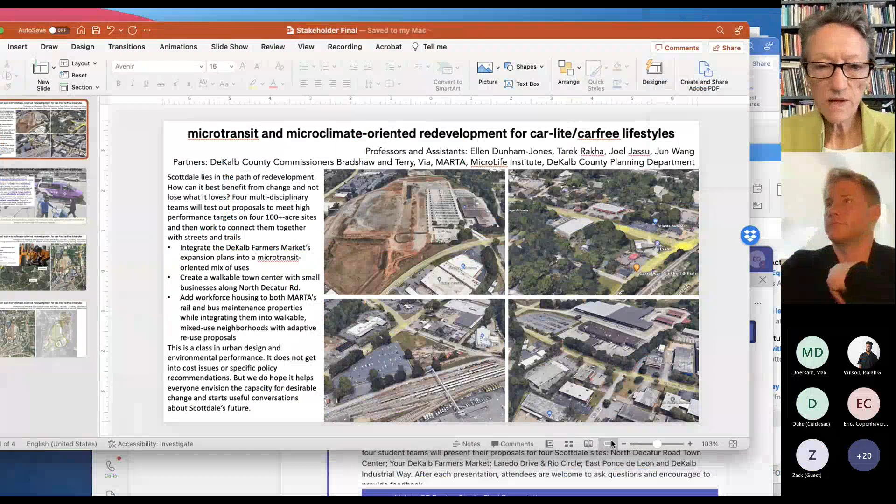Hopefully everybody is seeing a slide that starts with microtransit and microclimate-oriented redevelopment for car-lite and car-free lifestyles. So just to remind everybody, it's quite clear Scottdale lies in the path of redevelopment. All around the edges of Scottdale, we're seeing change and a lot more housing being built at much denser scales. So the fundamental question for the community is how can Scottdale benefit from redevelopment, improved connectivity, and a few more neighbors, but not lose what everybody who lives in Scottdale loves about the community.

So we listened to you, we met with you, we really enjoyed your feedback in the past. We have four multidisciplinary teams that have tested out proposals to meet high performance targets on four different 100+ acre sites, and then tried to connect them together with more streets and trails.

The sites, I think you probably remember—one is the DeKalb Farmers Market, really integrating the plans that have already been permitted for the farmers market to expand, but also now integrating into that a microtransit-oriented mix of uses.

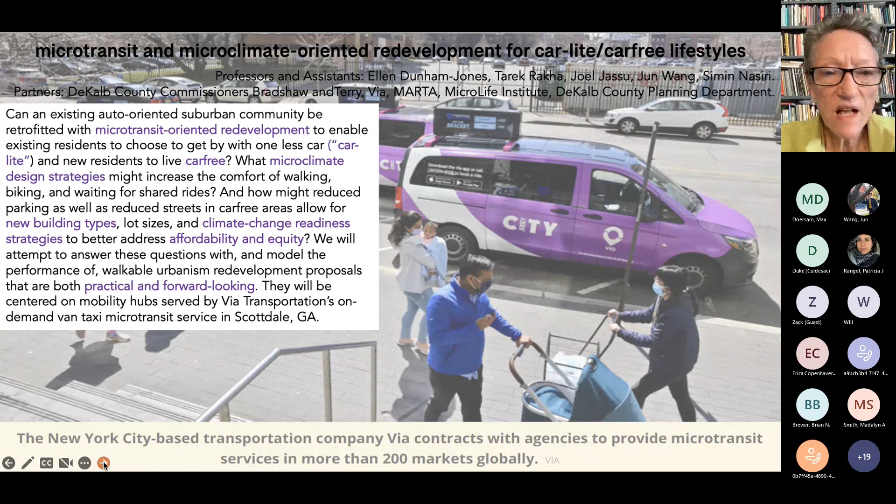Part of how the system generally works, with that integration of microtransit, public bus systems, private scooter companies, and privately owned bicycles, is by setting up mobility hubs where people can transfer from one of those modes to any of the other modes.

So the premise of the studio has been to look at where it would seem to make sense to locate mobility hubs, and then to generally densify around those hubs in particular, trying to allow a gentler form of more affordable density.

So the final projects—this is the last slide—show going from the Scottdale we know, which has some very large properties, but its industrial history means there aren't that many street connections. There are little pockets of walkability, but not much throughout this part of Scottdale. The new plans, stitched together from all four teams' proposals, show new trails and rerouted roads aiming to increase that connectivity.

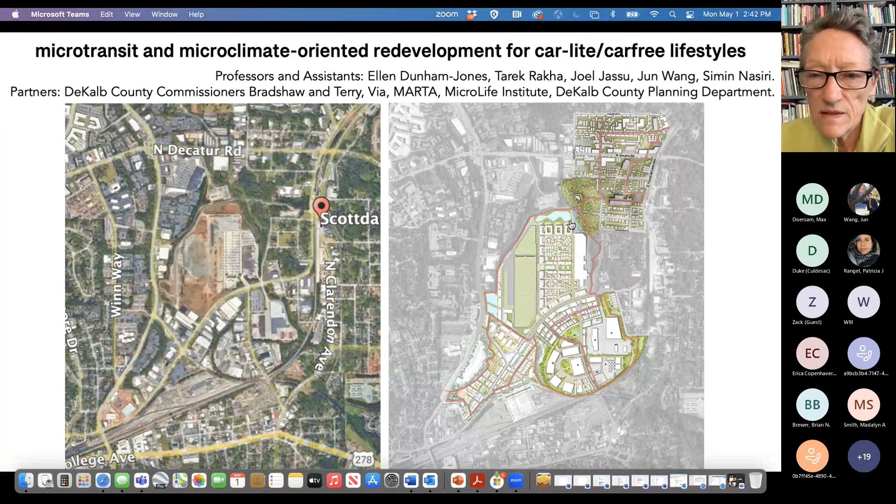All right, so Tarek Raka, are you here? Do you want to say any words? I don't think Tarek is with us.

Without any further ado, I think we can go ahead and start with team one, and I will invite the audience. The plan is I've asked the teams to each try to keep their presentations to 15 minutes. They're not going to be able to show everything in all the detail they've thought about, but they'll certainly give you a good idea.

We'll be publishing the students' work in PDFs online, accessible to the public through the Georgia Tech Library's public digital archive. We'll get those links out through Will and the MicroLife Institute. We'd love to hear your feedback, so we'll try to take a couple of comments at the end of each team's presentation, and then really get more general comments at the end.

So with that, I'm going to pass it to team one.

Good afternoon, thank you so much for joining us. We're just going to take a minute and introduce ourselves. My name is Patricia Rangel, and I am the MARC in our team. And I'm Akansha, I'm from the MSUD. I think our third member is with us, but she may be silent at the moment—Maryam was our HPBL student that helped us with all our climate analysis.

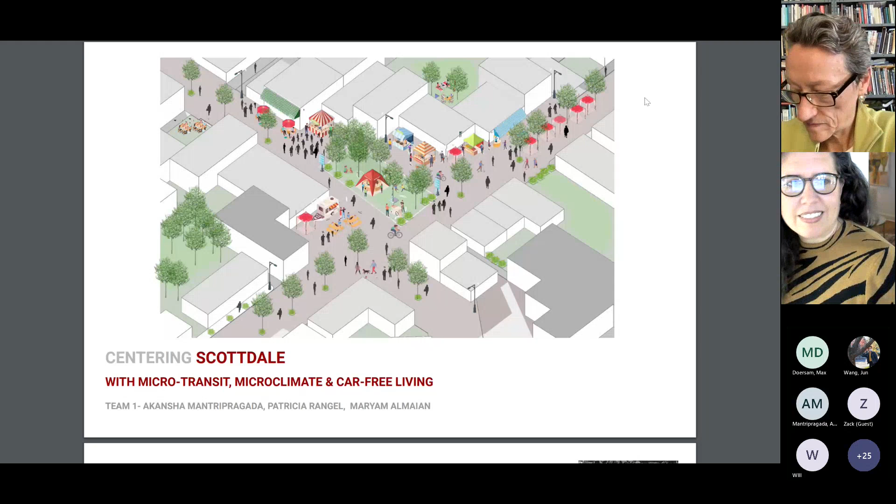All right, next slide. So our project—what we were really charged by the community at the stakeholders meeting to do—was to create a town center for Scottdale. Our zone, one of the four that we'll be presenting today, is actually in the center of Scottdale, and this intersection between East Ponce and North Decatur Road is a central hub.

However, we discovered—our goal was to create a micro-transit, microclimate town center that would serve Scottdale and the adjoining Clarkston, as well as the entire community about 7 to 11 miles out from Atlanta. So we know that there's imminent change for Scottdale at the moment.

The tenets of our project were threefold. We got to meet some wonderful residents of this area—our zone is the most residential, not very dense, but the most residential of the four zones. Our principles are: we want to keep the artistic nature and community already in existence; we want to promote the already self-sufficient, both environmentally and economically, culture that existed there; and thirdly, we wanted to do this incrementally to support people's ability to stay in the neighborhood so gentrification wouldn't displace folks.

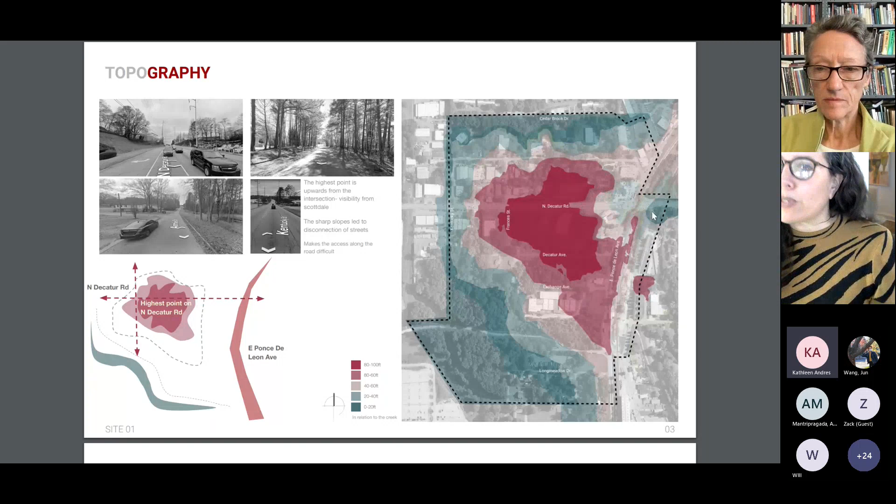Perfect, thank you. The grade difference really didn't allow for the town center to be right at that intersection of East Ponce and North Decatur, because the climb up was a good 8% in slope, which would make it much harder to reach many of these places, as these sections demonstrate. Coming east onto North Decatur Road, the slope is 8%; coming west, the slope is about 6%.

This topography definitely affected our understanding of the existing conditions in the street network. Some streets were not connected to one another because of those large differences in grade. And so we saw that people weren't necessarily able to capitalize on all the assets on offer.

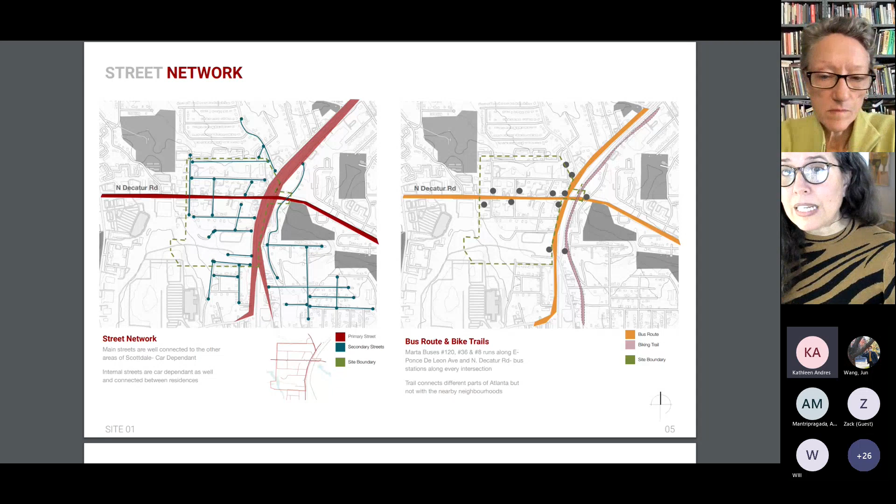On the right-hand side, you can see this tremendous bike trail asset, the bike lane from Stone Mountain Trail, right there. But these roads are quite dangerous to cross, and there aren't a lot of sidewalks, as we'll show in the next slide.

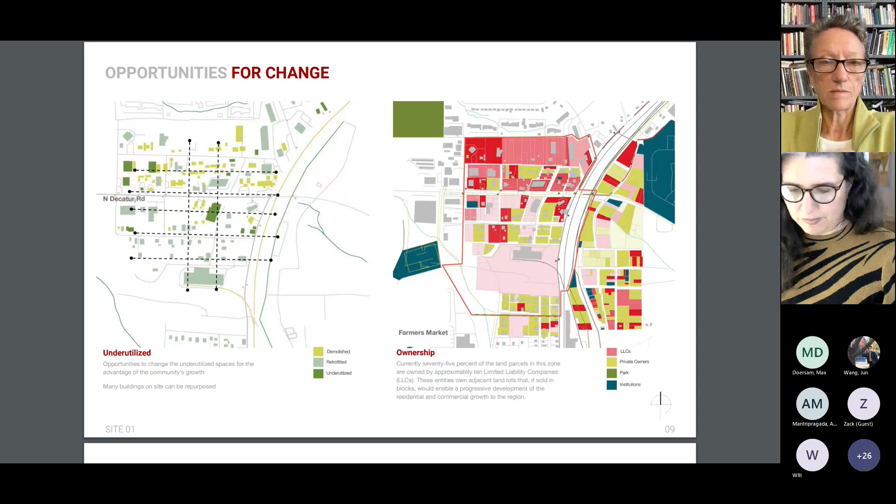So overlaying the county's plan, we envision a town center through the lenses of public realm, social infrastructure, different building types, and sustainability. We hope to achieve car-free living, walkability, dynamic streets with more tree canopy, artistic culture, and of course, more housing.

So we then went on to conceptualize our design targets by connecting streets, creating pause points, or a moment to experience more green infrastructure, and then developing around it.

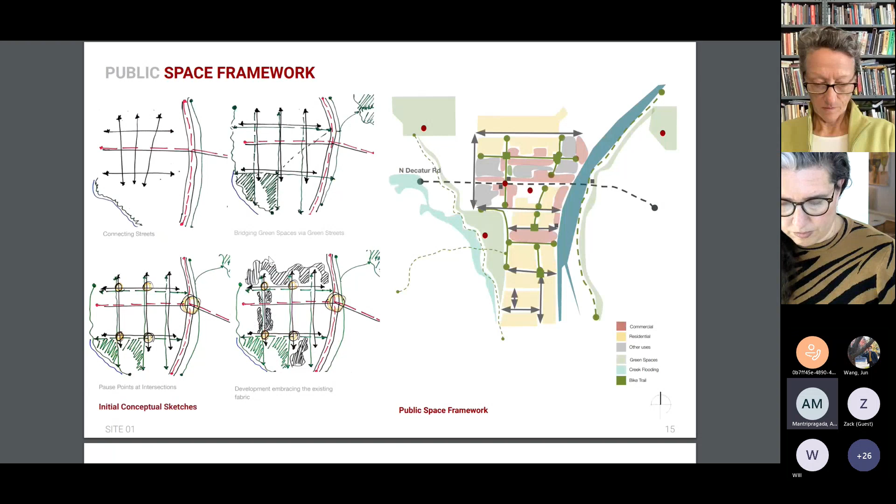After doing all of the analysis, we believe the mobility hub would be best placed at the higher ground, as Patricia already mentioned, which also lessens the speed of cars on North Decatur Road. In the smaller diagram, you can see we have our car-free zones, car-light zones, and car-heavy zones, which are mostly on the periphery of the entire site.

And that's how our plan would look. We have three zones: the Mill Center, Civic Center, and the Town Center. The Mill Center is about retrofitting the mill into an artisan square, with more housing toward the south of the mill — about 240 units — which doesn't look the way it does right now.

We're trying to blend into the language of the existing single-family housing, but it has way more units than you'd see. That leads to the retail pedestrian strip up north to the Civic Center, which is completely pedestrian walkable. We're trying to retrofit the storage unit into a resiliency hub, with lots of community gardens around it.

Which then leads up to North Decatur Road and a mobility hub right at the heart of North Decatur Road, with many transit options, leading us to this super block, or the town center, with a completely walkable retail space. We also have a lot of housing that we're trying to recreate from the cul-de-sac planning.

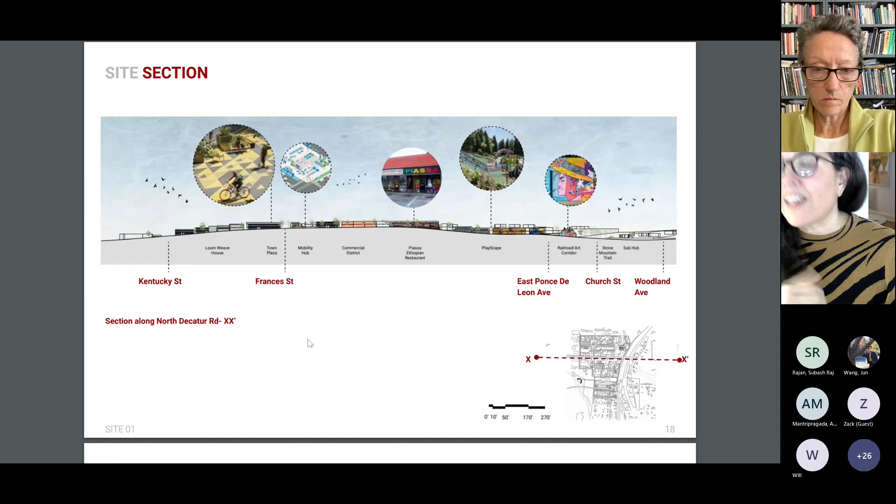This is how we believe our town center would look. We have a different hierarchy of streets, but completely walkable, allowing most services to enter, like trash services or fire trucks, but otherwise it's going to be completely walkable.

We hope to make it completely self-sufficient, both socially and economically. These are a few illustrations trying to show that. Our initial vision of the sketches of our town center was to look like this, where we have different transit options, more seating on the street, and it could be completely vibrant.

And lively. Looking at Akancha's beautiful drawings, I want to mention that in our site visit, this street, currently Alcove Street, was already almost more a pedestrian street than a car street. As we drove around, people were walking in the middle of the street because the entry from East Ponce is so awkward that in some ways we're just using the natural gifts of the site to enhance it.

And then we talk about the mobility hub. Here we're trying to show the different types of transit options that we're trying to incorporate. Overlapped with Miriam's HPB analysis, we're trying to have a net positive mobility hub.

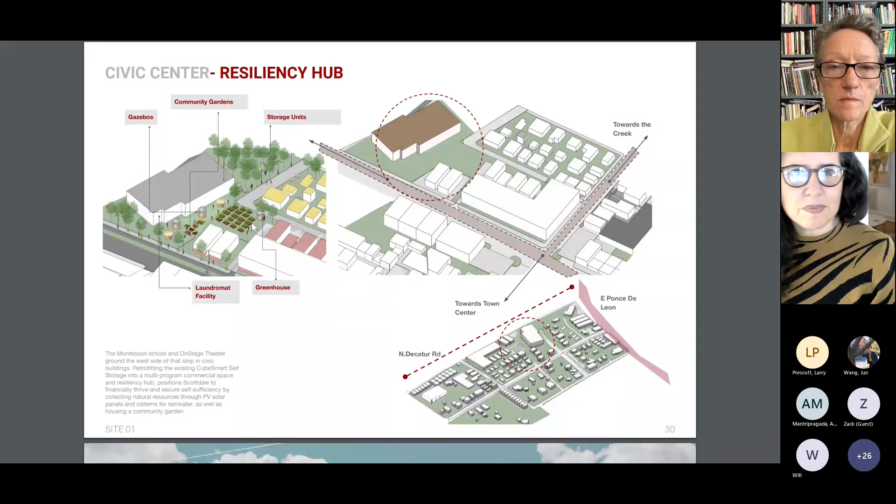But in the meantime, it would also be a place for the community to gather around community gardens, taking advantage of the gifts of the residents in building greenhouses and just creating a lively spot in the center of Scottdale. This is part of that vision.

And then leading down to the Mill Village is that pedestrian walkway that would intersect here, with some commercial spaces as well as resident spaces, more sidewalks and more walkability for residents.

These are some examples. Akancha did a wonderful job explaining how we wanted to really honor the style that's already existing. This type of housing is called missing middle housing. It looks like the traditional stuff in Mill Village, the historic Mill Village, but there are many more units in these structures.

That we are hoping can blend up to Cedar Brook Drive, where there are larger complexes of apartments. And so this is kind of a renovated mill with some of the housing that could be adjacent to it.

And then our last point is really that our regulatory plan is that we want this to be incremental. We want smaller lots so that it becomes accessible and affordable to new homeowners or those being displaced out of Atlanta, and that it can grow in a way that feels comfortable for everyone.

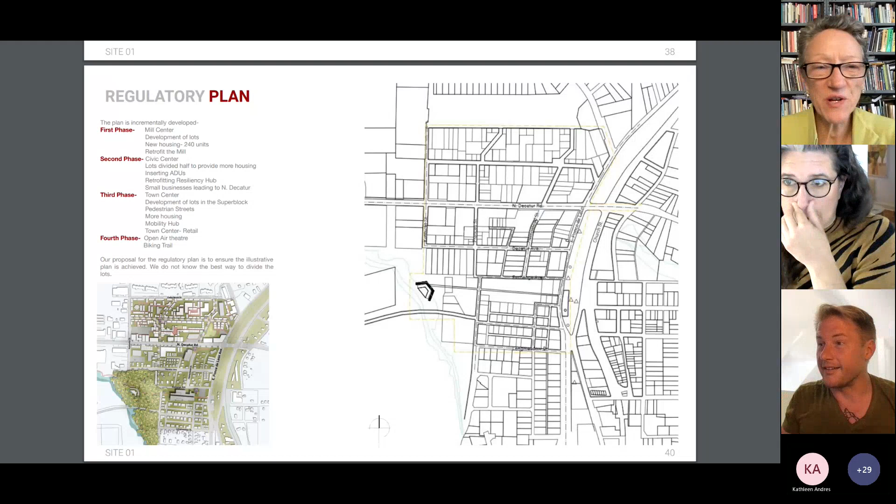Well, it was music to my ears when I heard smaller lots.

I think that's so, you're on point, team one. Thank you so much. And again, I think the idea of phasing as well as really utilizing the topography to your advantage in this plan was just great. So thank you for that.

Yeah, I definitely concur. I think that discussion of smaller lots and just better use of space is very crucial as we try to design a master vision for this Scottdale project.

I definitely like the reference to the super block. I think that to me is something I've been hearing about for years, and I think the idea of bringing forward a super block concept in DeKalb County would be great for publicity, showing that we're forward thinking, but also for the larger Scottdale community to have that environmental attribute, which is really positive, all things considered. So I'm really excited about this.

Yeah, I think that was it. Great job, team, really enjoyed it. Anyone else?

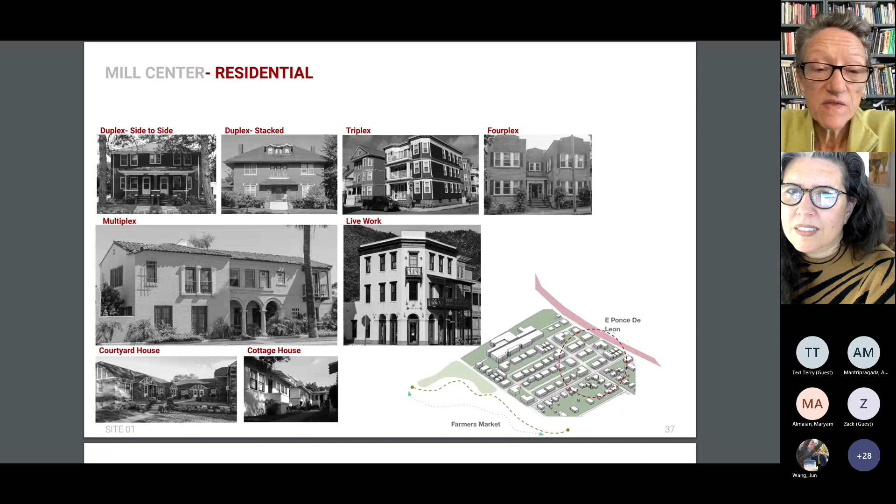Don't be shy. Maybe the team, if you want to flip back a little bit through some of your drawings slowly, I'd be interested to know how the community feels about the idea of the superblock being car free but mobility rich. Do you think that is realistic for Scottdale? Would you like to see that option?

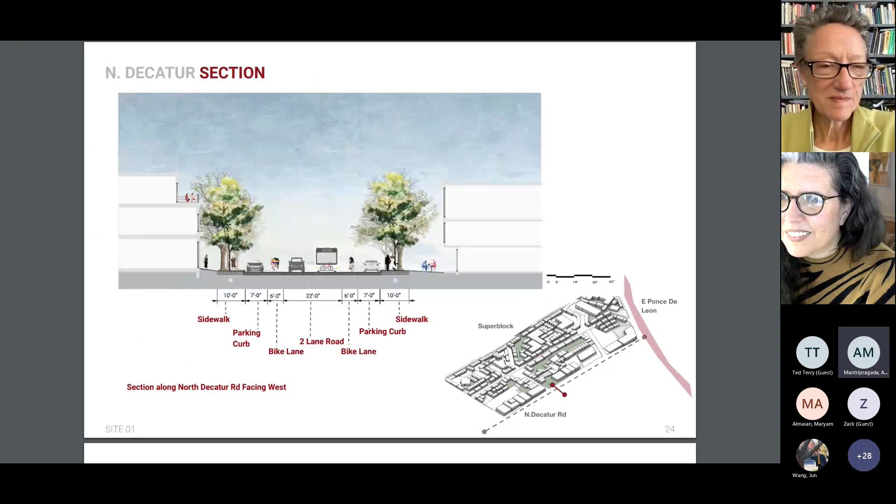Well, I think you guys did a great job presenting. I'll just say, Ellen, I think that is a great question, because there's so many other departments you'd have to coordinate with to actually make that happen.

But I will say that we are voting later this year on our SPLOST, which is a $600 million exercise for DeKalb County, and under the SPLOST rules, we can spend some of those funds on transit as well as transportation infrastructure. So I think this is great timing to help inspire the leaders in DeKalb to think about what might be an investment in the future. And this, to me, is a great opportunity to pilot out some of these methods.

Because I don't know if there is a location, maybe elements of the areas near the Beltline, but I don't know if there's a true pedestrian-only street, with that kind of transit piece to it. So I think that would be exciting to try to move forward. But yeah, you're right, you've got to get other players involved.

Commissioner Terry, I'll also say I learned so much in this studio. And I think some of the precedents that I got to witness about the superblock threw me out of my ignorance.

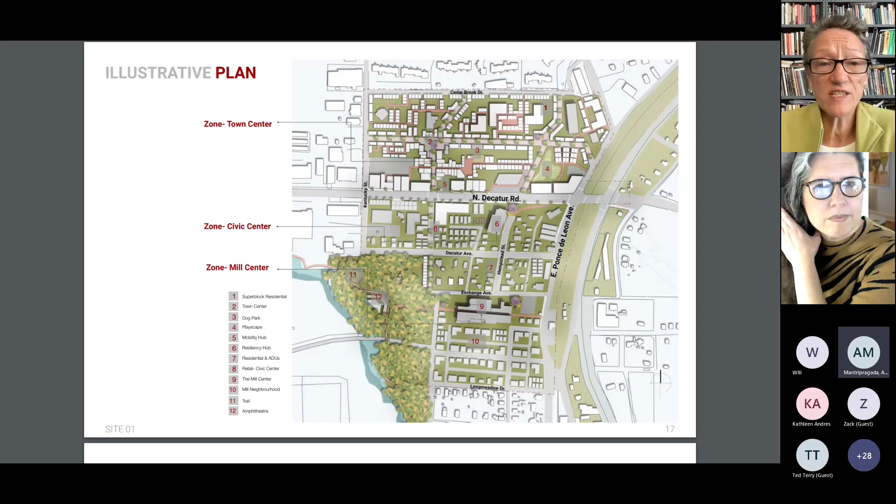No, it's a really important point, and there's a limit to how much, in a school project honestly, just how many people we're able to talk to in the course of the semester. So we're hoping to start some conversations, but we don't know either.

Well, I think it looks fabulous. So thank you, Kathleen, it's nice to connect with you again. And I'm sorry, I've been out working on houses—I look terrible, otherwise I would be on video.

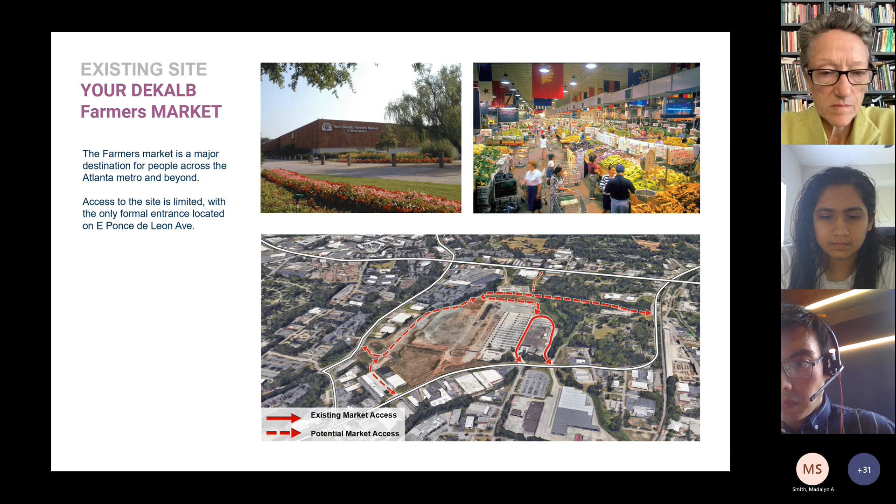So just really quickly, the farmers market is a regional destination attracting people from all over the Atlanta metro. Currently the only formal access to the site is off of Ponce de Leon, and the reason access is so limited is due to the extreme topography. One of my favorite things we learned during community engagement at the beginning of the semester was that people called this huge retaining wall the Great Wall of Scottdale, which is extremely apt. That was a challenge we really tried to deal with—to get people to access this site from all sides and make that an enjoyable experience.

With that in mind, we thought, okay, the market is expanding, but maybe there's a better way to go about this. We want to enhance the DeKalb Farmers Market and have it actually reflect the owner's philosophy of connecting people and food. So we've utilized three strategies to help achieve that vision: the first is to unlock the development potential of the site, the second is to enhance mobility, and the third is to incorporate eco-conscious design.

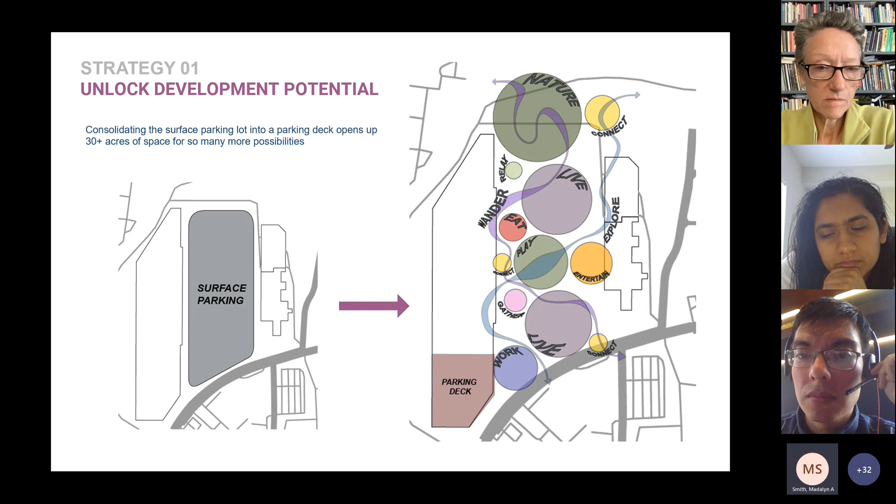We also realized the site is accessible, but not necessarily connected to the different MARTA bus routes going through it. So in our proposal, we recommend rerouting Route 120 so it goes in front of the new market and becomes a mobility hub serving the different parts of the site.

By having a mobility hub at the center of this new farmers market, we would also have a series of streets that increase walkability, creating a walkable, car-free neighborhood where people can enjoy and experience a connection with others and with nature.

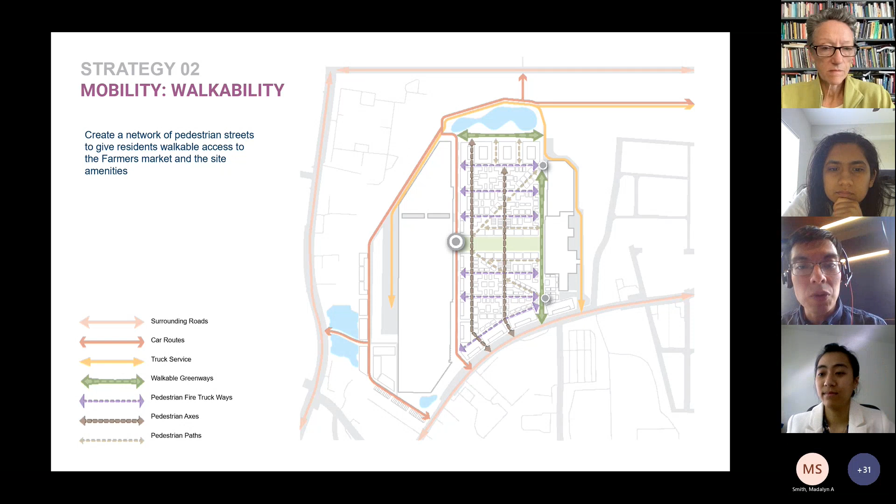With the change of topography we see on our site, with deforestation and cut and fill, there is an urgent need to protect the natural ecosystem to address future problems like stormwater runoff, flooding, and drought.

With this urgency in mind, we are bringing greenery into our site, and this becomes an amenity for the car-lite neighborhood we are designing.

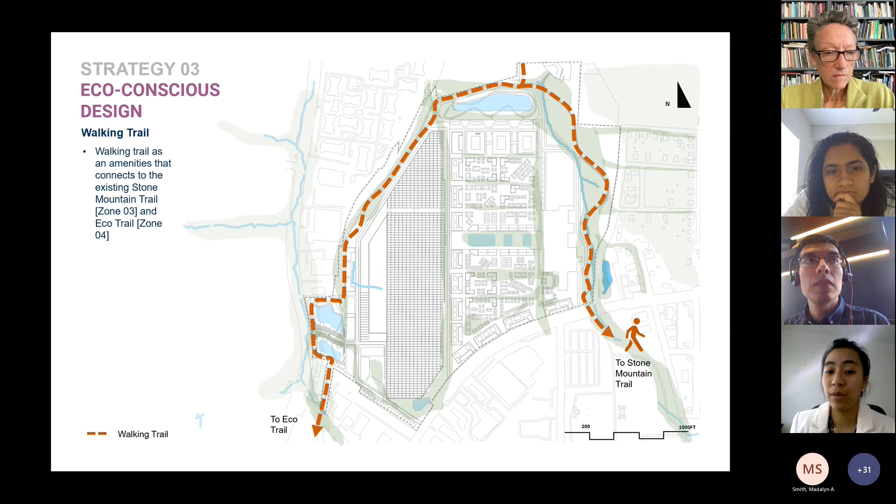With the greenery, we are providing natural boardwalks that respond to the topography of the site, creating experiential amenities for the area.

We are also proposing urban agriculture in the form of greenhouses on top of the farmers market, which will provide job opportunities and an educational learning experience for the community.

Using some back-of-the-envelope calculations, we found that with the site's consumers, our proposal will cover 100% of the food demand on site. It can create up to 32 jobs for the acreage of greenhouses on top, and generate up to $8.4 million in revenue.

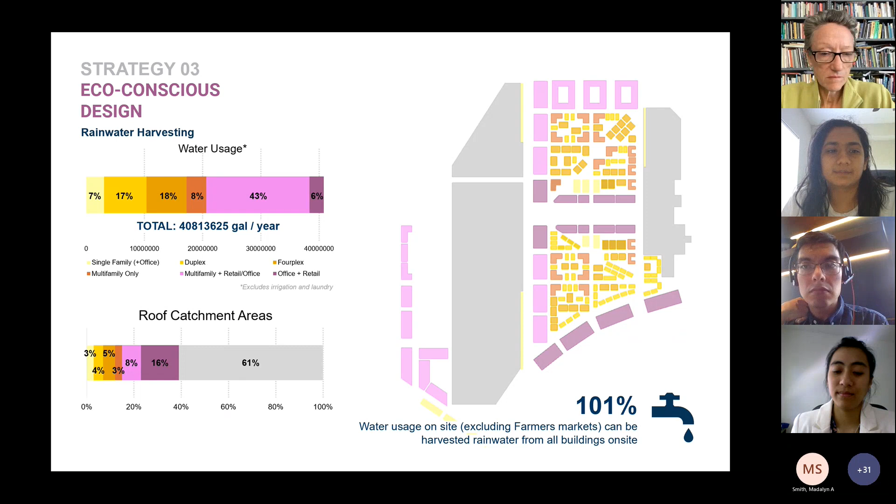In addition, we're proposing rainwater harvesting throughout the site. Here you can see the water usage occurring throughout the residences we are proposing, and using the roof areas of these buildings, 101% of water usage on site can be covered by rainwater harvesting.

We are leveraging the existing water features on our site to create a system of water networks that address stormwater runoff and help with water infiltration. We're doing this by daylighting the drain and redesigning the stormwater retention ponds.

The stormwater retention ponds not only add to the amenities but also help with water filtration and carbon reduction.

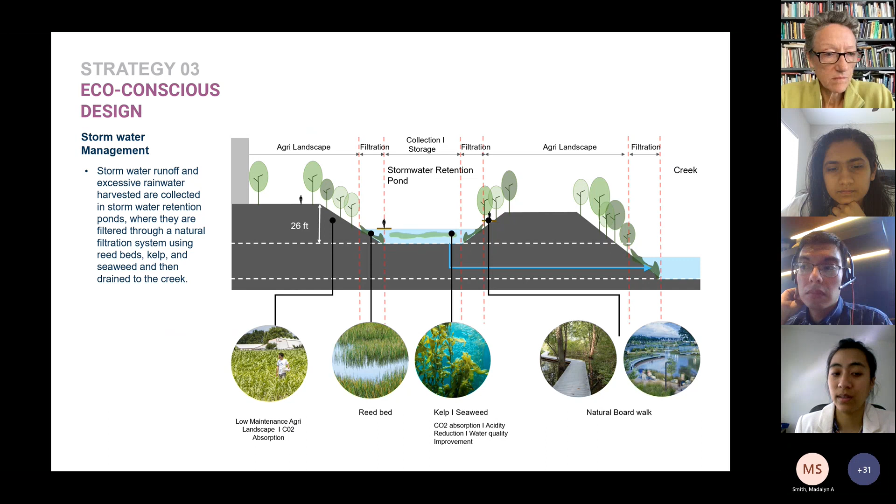One of the final eco-conscious design strategies we are proposing is photovoltaics on the rooftops. Just putting photovoltaics on the existing DeKalb Farmers Market roof would cover about 17% of energy use on site, whereas including the optimal roofs on site would cover up to 49% of energy use through photovoltaics and renewable energy.

Our intent is to create enriched public spaces throughout our site. We are doing this by activating the spaces along the ponds, the farmers market, and the central park.

We are creating additional diagonals and central access, integrating them with pockets of green, open spaces.

These spaces are further connected to meandering pockets of green spaces that link to narrow alleys, creating a lively, walkable pedestrian experience.

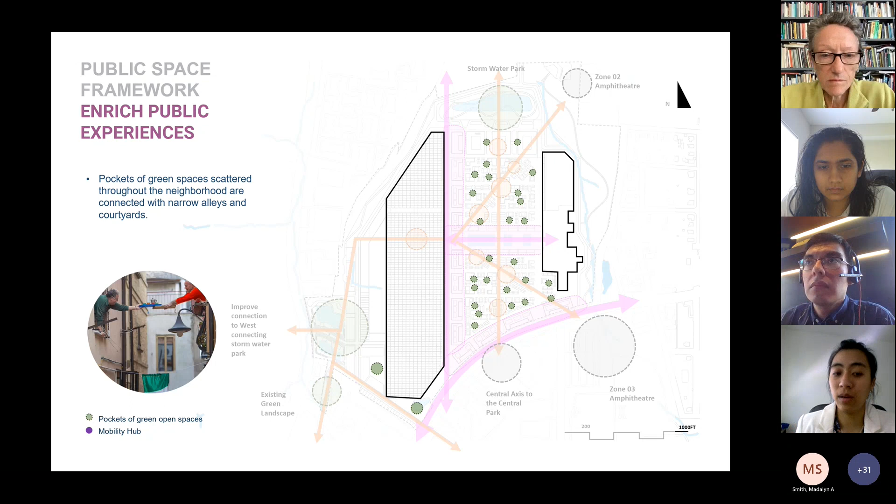So this is our overall master plan, which we feel has incorporated three strategies. What was previously an island in Scottdale would be more connected and integrated into the community. We've essentially left Mr. Blazer's plan intact, and as a result, we've focused our design strategies in three key areas.

We've focused on the creation of the car-free neighborhood, and we've also focused on creating a really great central public space, mobility hub, and gathering place. And then we've also focused on developing the edges of the site to invite people from the surrounding community into this property that was once really cut off from the rest of the area.

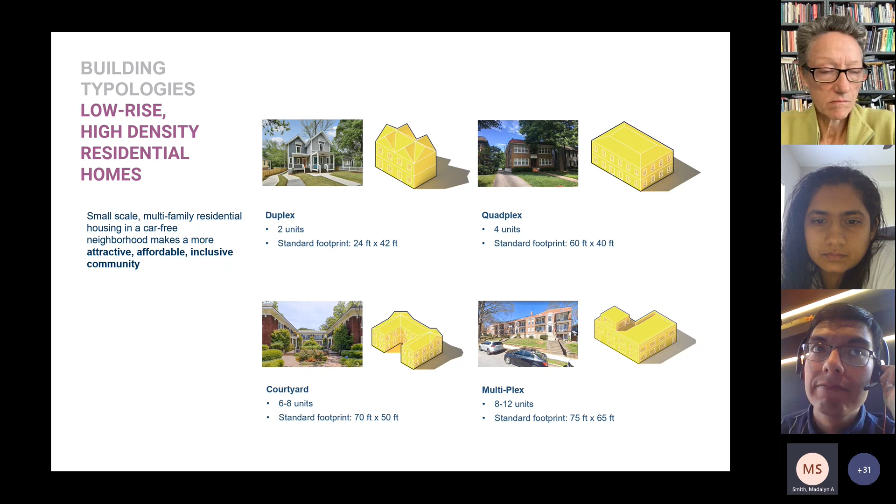Within our development, we are envisioning a couple of different types of housing and mixed use buildings to infill this area. Within the actual car-free neighborhood, we want to keep it really human scale, really traditional neighborhood scale, not going over more than 2 or 3 stories. The built environment is very traditional in appearance, but it does allow for more density. So all of our units are technically multifamily, even though they're still low rise, small scale buildings.

We also have our mixed use buildings on site. We're proposing some options for live-work townhomes, and we think that provides a great opportunity for small business owners. We also have larger mixed use areas that line our public plaza to activate that space, and also mixed use along Ponce to activate that street and make it much more lively and enjoyable to walk along and explore.

To summarize, the proposed performance achievements are 100% food production, 49% renewable energy, which, looking further, we can consider using building integrated photovoltaics in order to reach the full 100% renewable energy on site, and 101% recycled water used on site. Next.

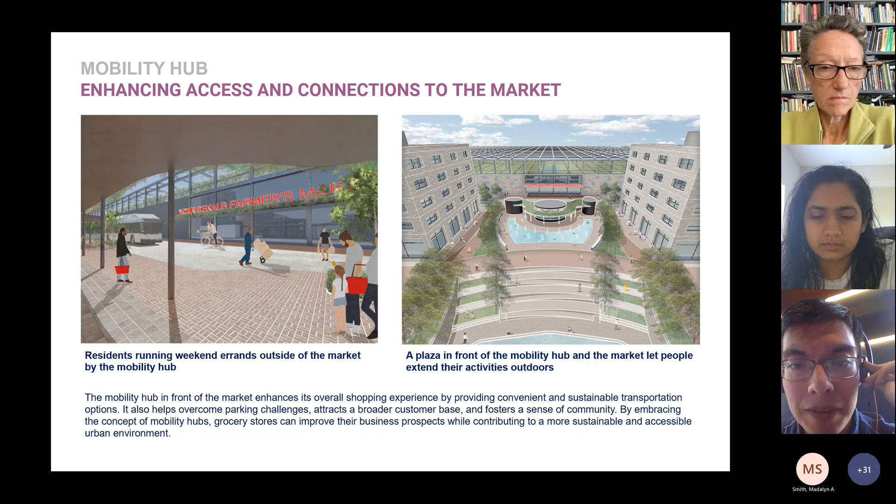And these are just some of the concepts that we were really thinking about when developing the mobility hubs.

Essentially what we wanted to have in front of that mobility hub and the market is this gathering space where people not only from this new walkable community would come and gather, but also people who came to the market, while they're waiting or just have time, can go into this park and experience it. This park is a stormwater retention pond, so it would flow and people would be able to interact with the water as it's going up or down.

These are some of the concepts, and what the plaza really focuses on is connecting food, water, and people. There will be restaurants on the edges of the park, the stormwater retention pond, and many other types of amenities, so that everyone can come together and develop a sense of community here.

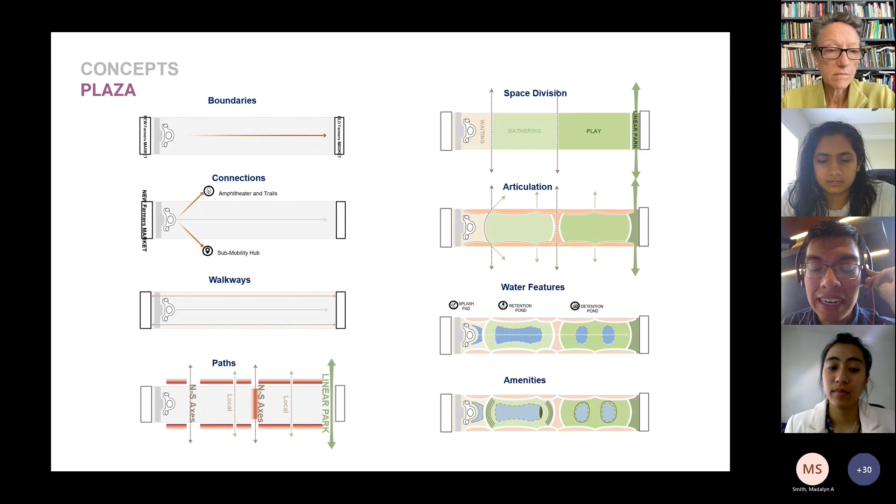So our new car-free neighborhood is what we're calling Market Square. And yes, I know it's shaped like a rectangle, that's just not as catchy of a name. In Market Square, within a 3-minute walk, you can reach anywhere on site: the mixed use plaza, the mobility hub, the DeKalb Farmers Market, and you can also reach the edges of the site so you can go and explore the rest of Scottdale as well.

Within the neighborhood, there are a series of semi-private and semi-public spaces. We've really wanted to incorporate green space as an amenity, and these different spaces would have different types of functions. You could have more interior courtyards that are more private, with outdoor kitchens and places to sit and gather. The green spaces on the edges of the blocks can serve more functional uses, like community mailrooms, package lockers, bicycle racks, and trash collection.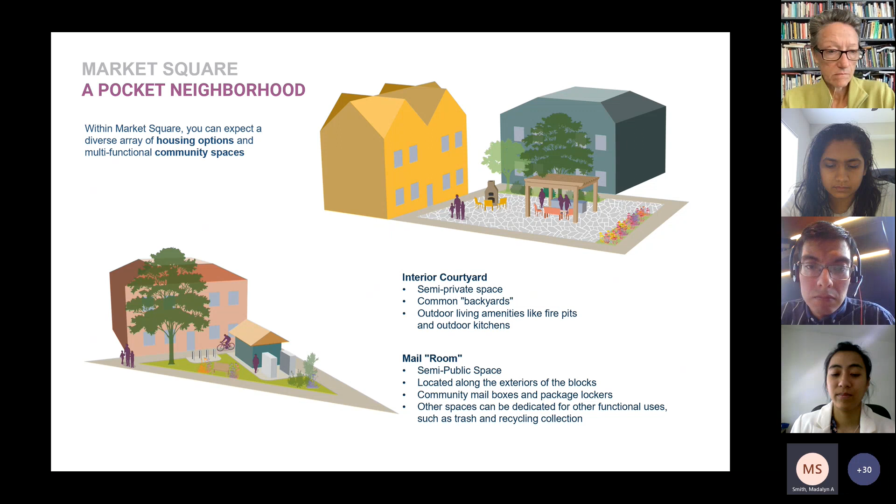Our third strategy is to develop the edges in such a way that it connects the existing surroundings with the site with respect to the topography. So the edges create a green infrastructure that brings people from the surroundings to the site.

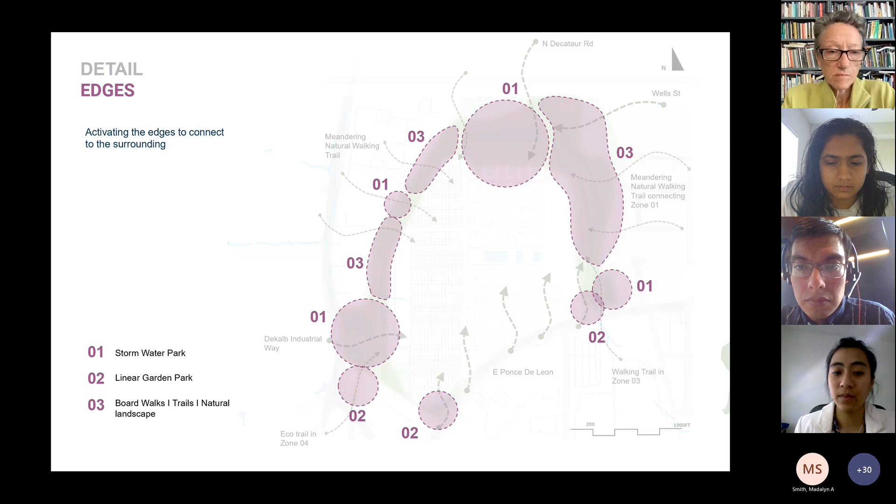This is the overall plan for how we are developing the edges. We can clearly see that it is integrated with the surrounding, and the main idea of the edges is to encourage more walkability into our site through the parks and green infrastructure.

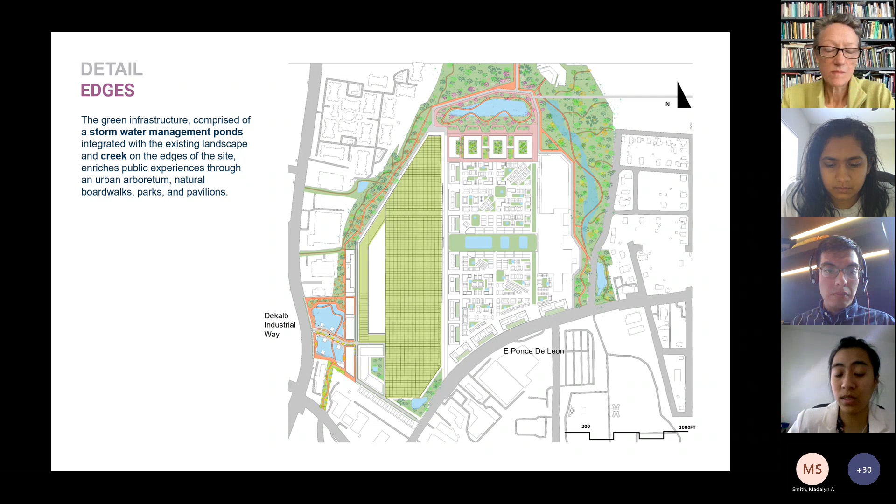Moving ahead, we'll talk about the details of the site. First is the stormwater park on the north, which has senior housing and boardwalks. This is the view showing the senior housing on the left, and on the right there is a stormwater pond. This is how it looks.

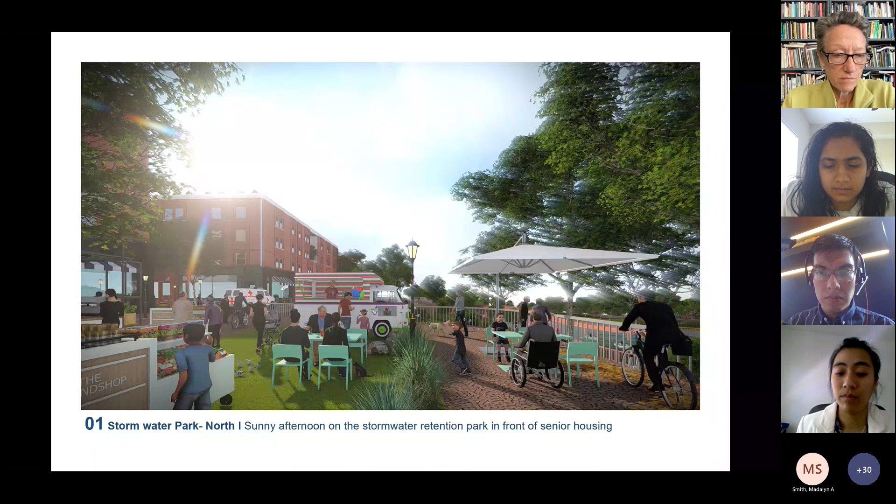This is a view from the boardwalk, how it looks. We want to create different experiences for the people here.

This is the stormwater park on the west, where there are mixed-use buildings, pavilions, and boardwalks. The intent is to reactivate the west entry from the Dekalb Industrial Way, so this becomes another additional entry to the site.

This is the view from the west entry to the site through the stormwater park.

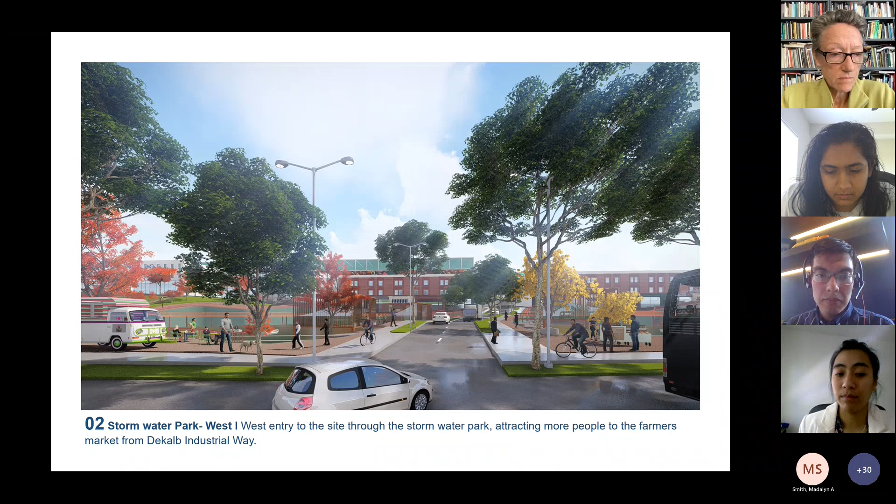These are the linear parks. We want to create a different public experience through an urban arboretum, encouraging more walkability and bikeability.

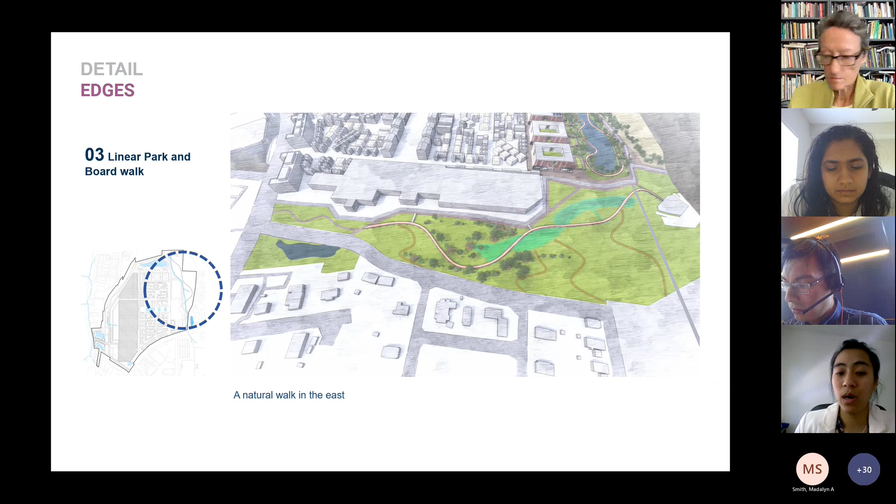This is the linear park in the east, integrated with natural boardwalks. This is how it looks. People can become close to nature and learn from it.

Regarding phasing, we are starting with phase 1 along the ponds and the farmers market. The second phase would be the neighborhood development in the lower bottom area, the third would be development on the top north, and the fourth will be on the west side, which is mixed-use development.

So overall, in conclusion, parking lots suck. Isn't this better than a parking lot? But for real, the DeKalb Farmers Market is an Atlanta institution, and we really want to propose something that would center and enhance the market, and also make this site more economically useful for the owner, and more socially and ecologically beneficial for existing residents of Scottdale and any future residents of this area. Thank you all for your time today.

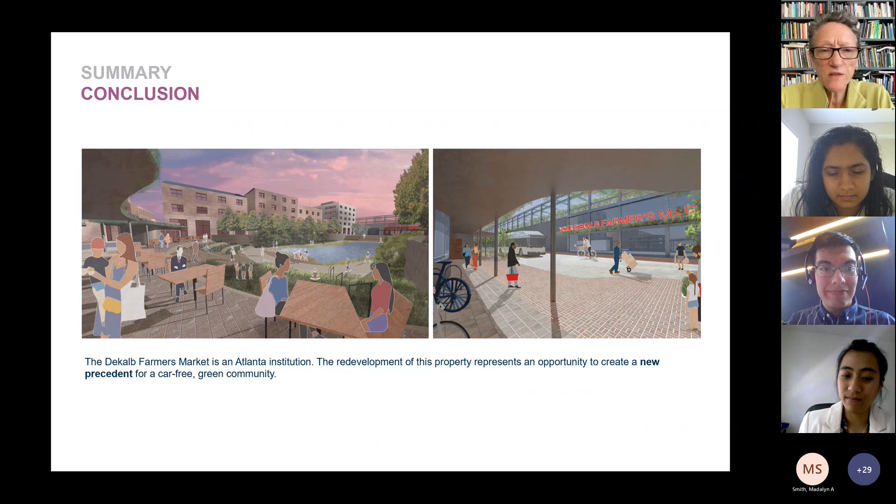You guys might want to slide your slides back to the master plan, or not quite sure.

To reiterate what Madalyn said, parking lots do suck. Sign me up, I live near this and I would love to see this happen. I really enjoyed how you thought about the full picture, aging in place, integration of everything from starter housing to living there full time to aging there. And incorporating everything from the green roofs and producing its own food, making this almost like the Disney of food destinations, allowing people to really interact with the mission of Your DeKalb Farmers Market. So kudos, I really enjoyed the presentation. Thank you.

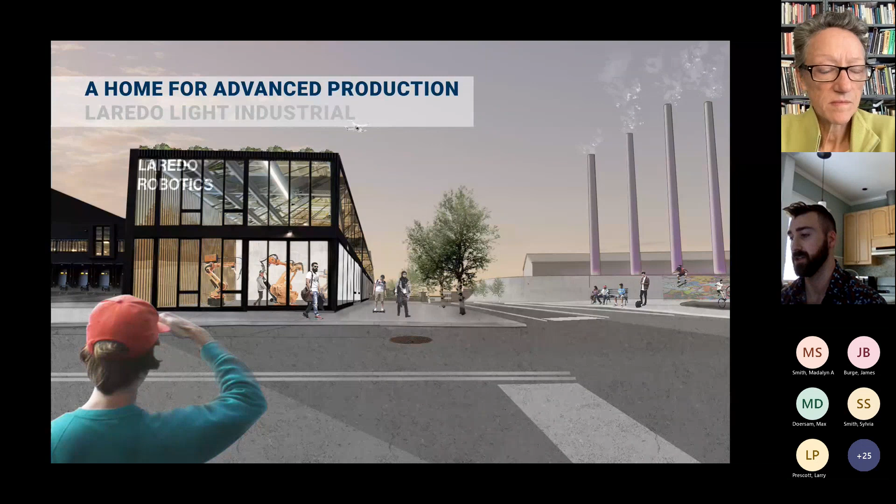This first image is our proposal for the light industrial space being preserved and enhanced to accommodate future modes of light industrial production, while also coexisting with mixed-use residential and other commercial areas surrounding the site along Laredo. This project is about celebrating light industry as well as the creation of sustainable energy.

And towards the northern portion of the site, which abuts East Ponce de Leon, we want to have a more diverse mix of buildings in terms of retail, mixed use, and residential typologies.

Looking at the existing site and its land usage, the site is entirely composed of the light industrial type. This includes MARTA's Laredo bus facility, which is a major player here, composing approximately 30% of the land area.

So our site sits directly in the path of development on all sides, with the new Publix and apartments further down on East Ponce, a newly expanded downtown and new multifamily developments in Avondale Estates to the south, and, as discussed in the previous project, a tripling in the size of the DeKalb Farmers Market. So we're proposing the creation of a sustainable, resilient community that will preserve and adapt the existing light industrial use type in the face of encroaching development.

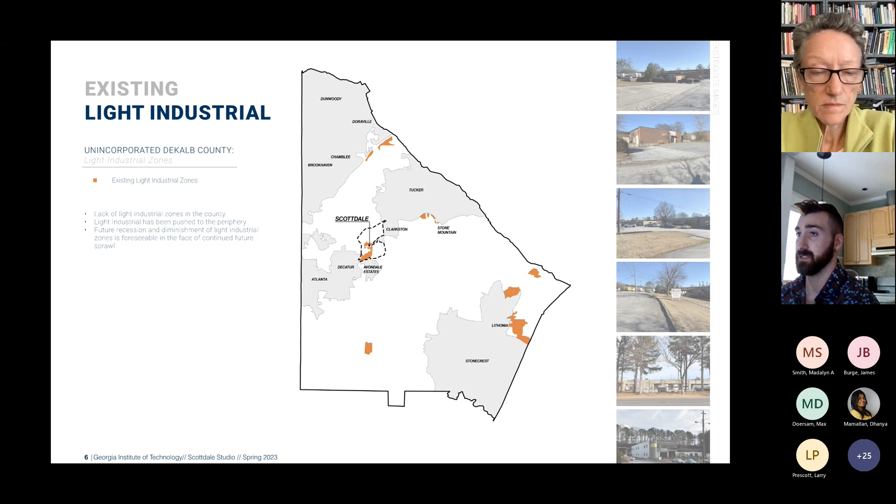This is an example diagram showcasing what went into evaluating the existing industrial buildings on site. We evaluated the light industrial buildings and determined whether they're aesthetically significant, whether they serve a purpose, and if they're in good condition to serve the needs of the future light industrial fabric we intend to put in place. We advocated for the preservation of most of the structures present on site.

Going back to MARTA, with them being the key player here, we're looking at how they're going to be electrifying their entire bus fleet by 2040. We're interested in exploring workforce housing options to accommodate employees, many of whom engage in unsustainable means of traveling to and from work, as indicated in these graphs below, where we see 80% are driving alone, even though a fair percentage are carpool eligible, and almost half are able to use existing transit systems.

We also see in the graph to the upper right that a lot of the employee residences are nearby, but also somewhat far away. So you either need to drive or use one of these other means of transportation. Workforce housing could potentially provide a more sustainable mode of getting to and from work.

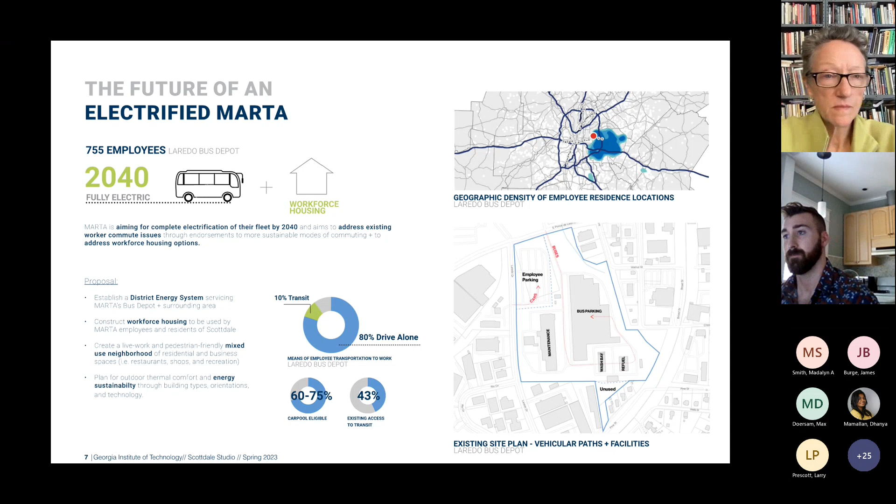The existing site, as we consider it, looks pedestrian hostile and lacks simple infrastructure such as sidewalks that would allow for human scale occupation. Laredo Drive especially presents itself as a wide open, straight cut-through street between North Clarendon and East Ponce de Leon. This condition ends up encouraging vehicles to speed and deters pedestrians from lingering on the site, so we couldn't find many people walking along.

So we consider these as economic opportunities in terms of looking at how we can reroute the existing Laredo Drive and also enhance economic opportunities along this road condition.

We're proposing a complete reconfiguration to Laredo's path and street design that will slow vehicular traffic, introduce a pedestrian safe sphere which includes an entirely car-free neighborhood shown to the north along East Ponce, and would promote the creation of more economic opportunities for businesses, as well as accommodating a new connection directly across to the proposed farmers market site.

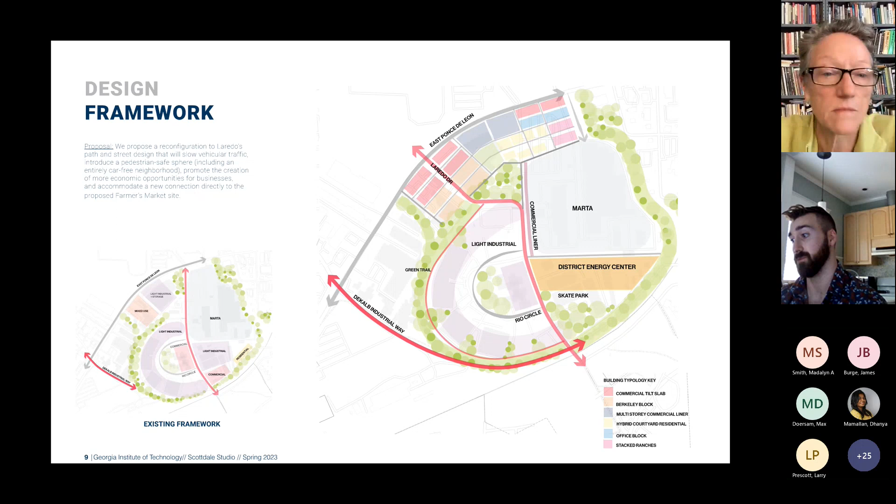Just south of the bus depot is the district energy system facility. We wanted to establish a synergy to achieve circularity, keeping in mind the bio-waste that might be coming from the farmers market, as well as from the light industrial zone.

Next to this, we've shown a preserved space for light industrial in Scottdale. Also, the existing trail has been extended to wrap around the site, and we've given importance to green open spaces that tie all the amenities we're putting in place together.

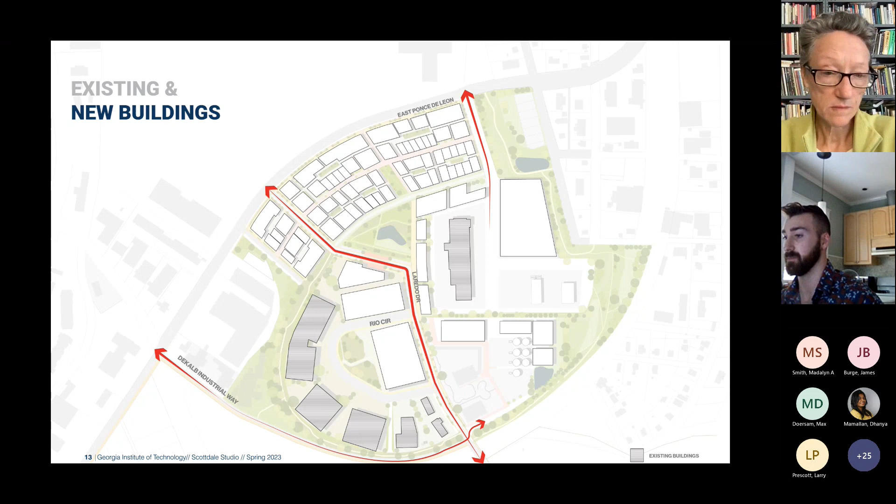This diagram shows, from our master plan, the fronts of these buildings and lots that line our newly proposed network of vehicular and pedestrian streets. Again, this foreshadows the idea that there are a lot of opportunities for storefronts and restaurant spaces inside of these neighborhoods that are being created.

We also wanted to provide an overview of MARTA on site. This image shows a bird's eye perspective of the MARTA bus depot, showing the proposed parking garage to the left side, and the proposed district energy facility on the horizon, with the different components included in that entire process of creating sustainable energy from biomass.

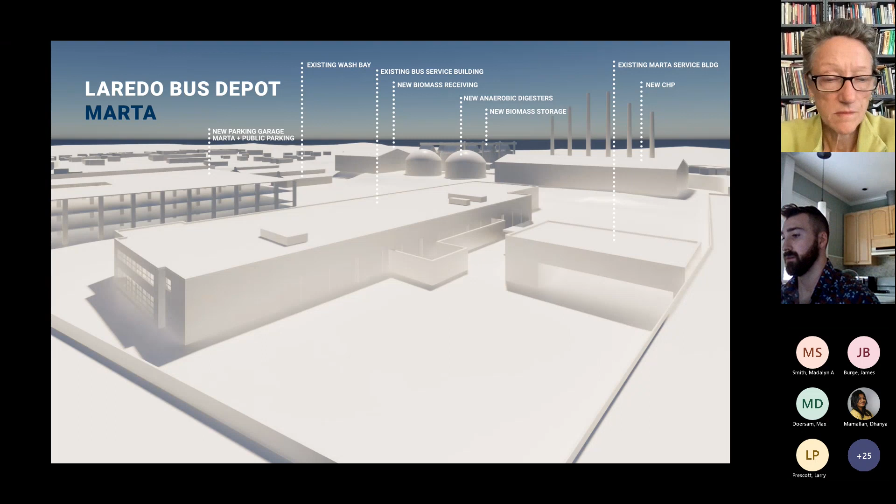This gets at the idea of how that parking garage could potentially serve both the public, the people who live in the neighborhood, as well as the buses themselves, allowing the buses to continue the circulation they already have on site. Instead of parking on a surface lot, they would park within the garage, separated by levels from cars used by the public and the people in the neighborhood we're proposing.

From a sustainability point of view, our project is focusing on a district energy system. Essentially, it's a centralized energy distribution system that provides heating and/or cooling to multiple facilities within our specific area. Given solar panels and battery storage connected to the grid, the system can help control peak loads and peak demands by providing a more efficient and flexible way of meeting heating, cooling, and electricity consumption needs.

For instance, during periods of high demand, the district energy system can draw from multiple sources like the PV panels or battery storage to help meet current demand without overloading the existing grid. By providing a more efficient and flexible way of meeting energy demand, the district energy system will make our area more resilient in general, and will also take stress off the existing old power grid.

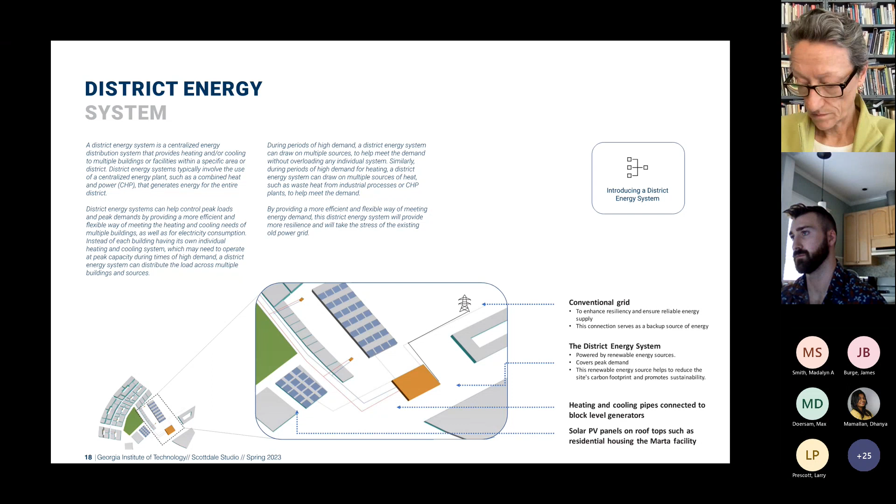This diagram shows the synergistic relationship that was just mentioned, showing how food waste and compost, as well as compostable waste like wood products, could be brought to this energy system in the form of biomass, which could then be processed and energy given back to the farmers market, MARTA, the new neighborhood, and the surrounding residential area in the form of energy, heating, and cooling.

This goes back over that, showing the proposed district energy system service area. We're thinking this can provide energy to all of the surrounding businesses in a more sustainable way, and is also providing some level of resiliency in the face of an aging and overwhelmed power grid, which is most certainly going to be increasingly strained in the face of climate change.

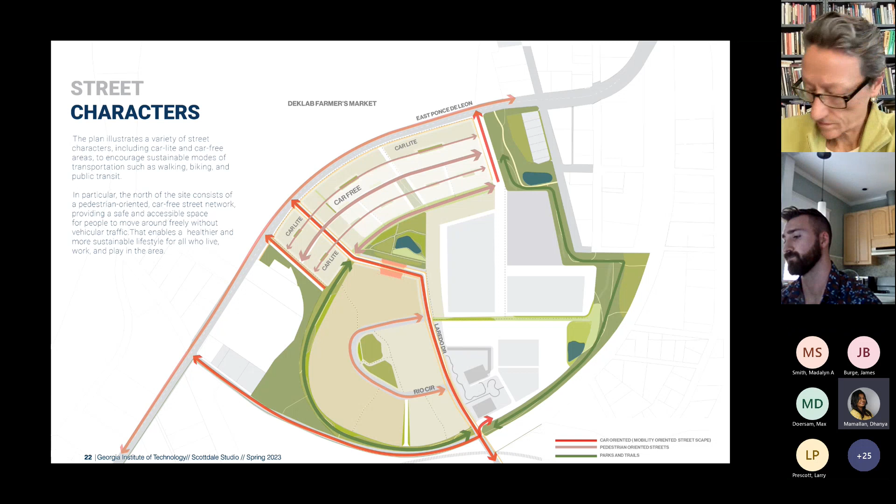Moving into Laredo Drive. Go ahead.

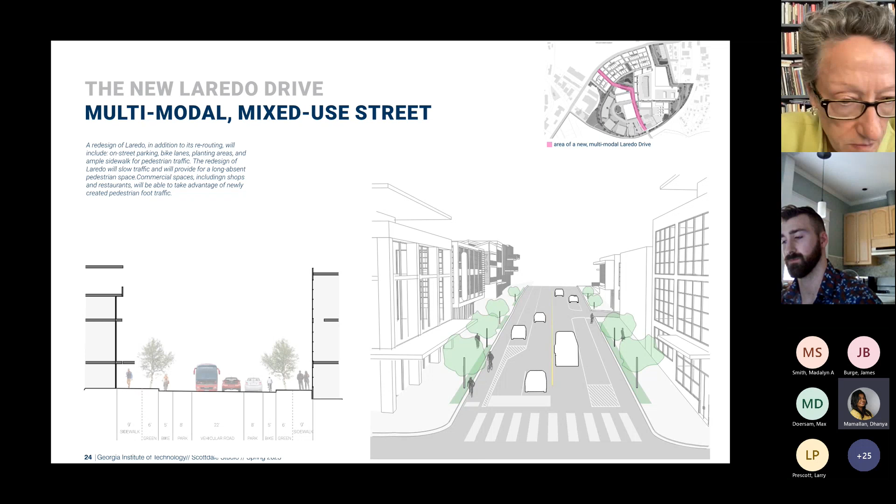This is a section showing how we intend to integrate bike lanes, on-street parking, and plenty of ground floor retail and businesses, as well as spacious sidewalk areas with plantings for pedestrians to enjoy the stroll across the new Laredo Drive.

And this is a rendering that begins to get at this vision of how a multimodal, mixed-use Laredo Drive could look like.

Going into that neighborhood we keep referring to, this is envisioning a car-free area composed of new residential and mixed-use spaces, providing amenities such as shops, restaurants, and communal park spaces at various scales, with plenty of tree canopy and greenery along the way.

And here we have that vision of what an active, car-free pedestrian neighborhood could look like. We see people using that park space, street activity, and plenty of shops and shop spaces along those ground floor levels.

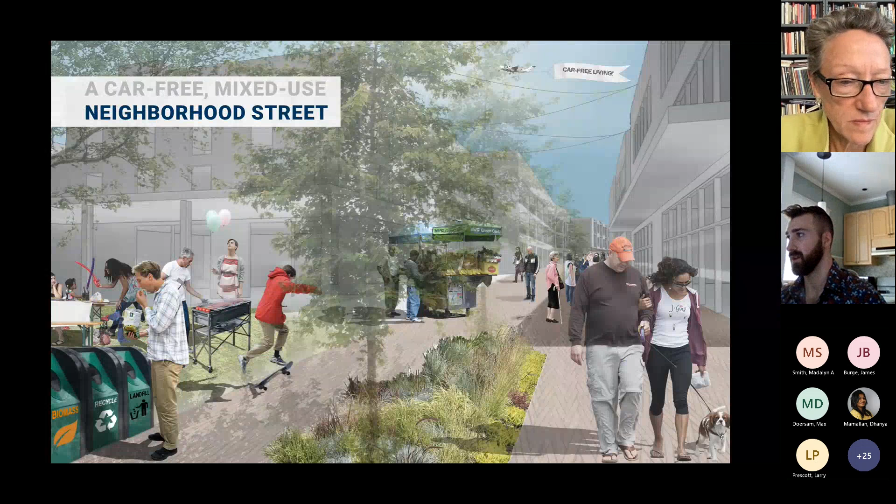Just giving a sense of that whole neighborhood, this is a view from inside of what we're proposing as a new training facility for MARTA on the site, overlooking all of these new parks and green spaces, shops, restaurants, and apartments.

In this view, we're speculating where a worker at MARTA that lives in this car-free neighborhood, in workforce housing integrated into this entire development, may also be able to see their home from the window of their work. So it's reinforcing the idea of connectivity and car-free living.

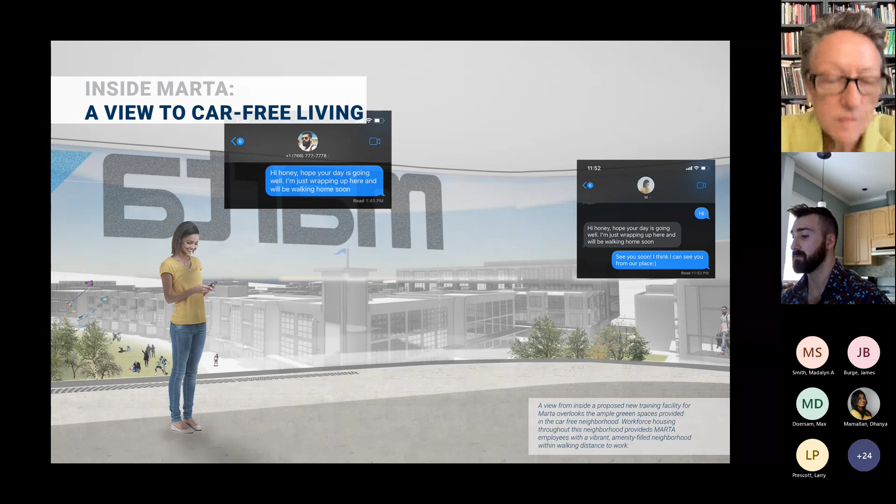Thank you, that's well. All right.

Comments and questions for Team 3, powering the future with district energy and workforce housing at MARTA.

Overall, I think it looks great. I think that's a good layout, separation of the different modes and the area impacts.

I'm always a devil's advocate, and safety is always a huge concern with us. I think the only flaw I find is the mixing of cars and buses - we always keep that separated, but that's something that can be worked around. The parking structure is a viable option, but that operational mix is a safety concern we'd have to overcome.

What do you think about the district energy as a way to power the electrification of MARTA's fleet, Larry? That's a great thing, having the solar panels supplemented, replaced so to speak. That is a success out there for us.

With the increasing EV charging, that's always a concern with the local grid being able to support it, especially with the Avondale Yard in such close proximity already having a large draw, and our EV bus fleet is going to increase over time rather quickly. We're already looking at those energy shortfalls, so this is a great progressive look at that.

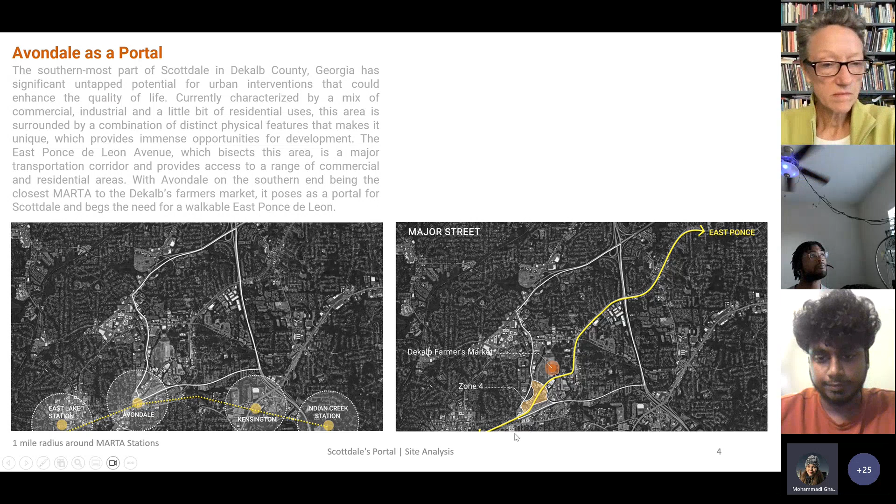One of the important features of our site is the intersection in the middle of our site that has separated our site into 4 different parts with unique features. This intersection is at East Ponce Street and DeKalb Industrial Way.

The other important feature of our site is it has the MARTA rail yard nearby, and also MARTA has property near it that has good potential for development there.

But the problem is this site is not walkable because the condition of the sidewalks is not good. Also it doesn't have much public space or green space, and the only green space is the dense vegetation around our site. It's not walkable because of the parking lots fronting Ponce Street and also the low density of buildings there.

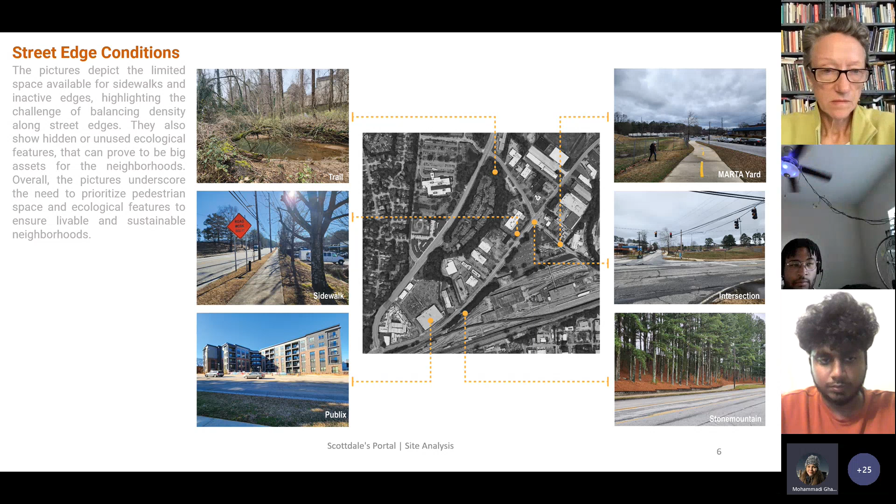Next. These pictures present the condition of the sidewalks and the edge of Ponce Street, which is not activated, and also the hidden potential of the eco trail near these green spaces.

To summarize the issues of the site: the intersection distinctly divides our site into 4 parts, and we subsequently found one opportunity for each. For the intersection, we proposed a mobility hub, since there aren't many public venues or public spaces on our site - the nearest ones are almost half a mile away.

Our plan for that was to incorporate green infrastructure and maximize the efficiency of parcels to increase density.

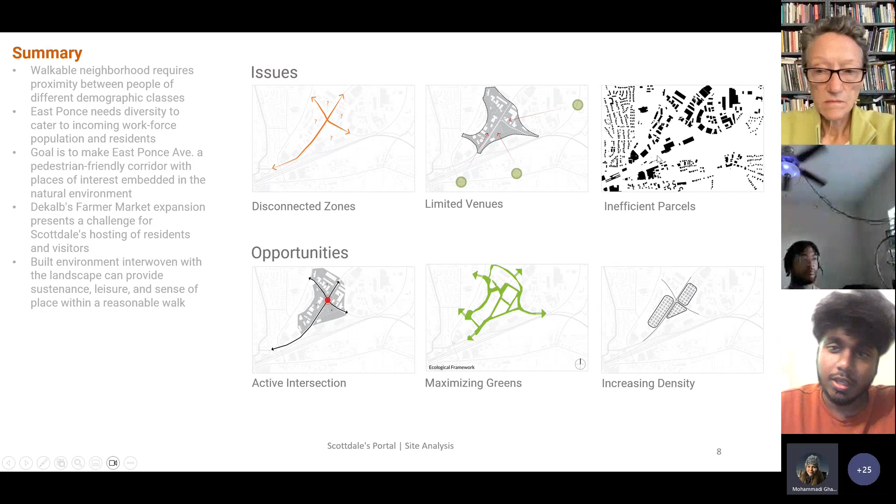Also, when we do that, the density in these zones drastically increases, and it helps balance the overall walkability and the neighborhood's image in this area.

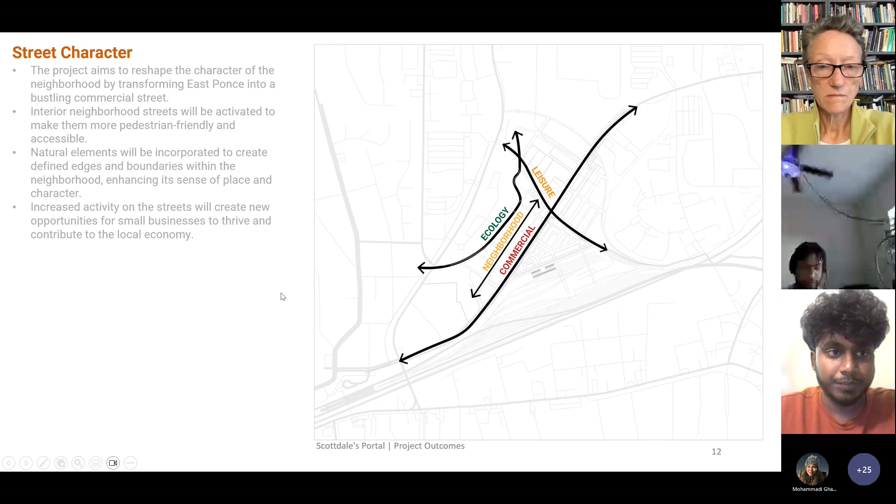At the beginning of our semester, we met with stakeholders and city planners of Scottdale, and it was really important for us to incorporate their ideas and concerns into our design process. For example, they wanted sustainable neighborhoods, with the condition of sidewalks and street lighting better than now, making it a safer place to walk. It was also really important for them to retain the natural features of their neighborhood.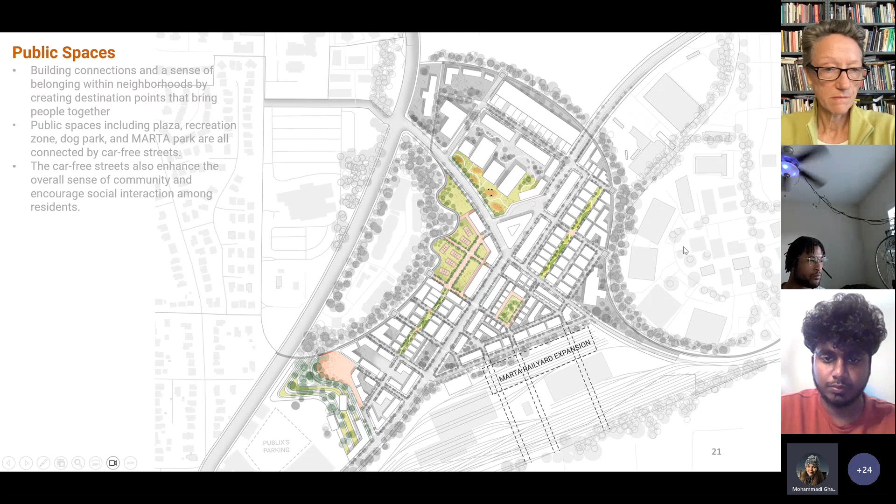We propose more public places that encourage people to communicate, like the plaza, the recreational center, the dog park, and MARTA park. All these areas are connected to each other with car-free and green streets.

So apart from creating connectivity within the site itself, this framework allows the neighborhood to access this zone via multiple points. Like Negar mentioned earlier, on these edges we created plazas that step down into the site, despite the topographical differences.

And even from the public parking, people can access it. With the new development, people will also be able to access the MARTA side.

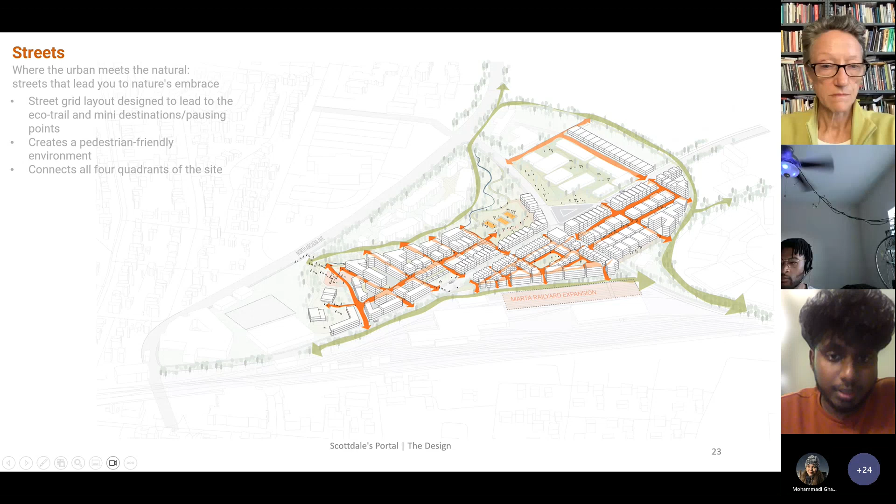We laid the street grid so that all the streets from East Ponce lead towards the Eco Trail, because right now, if you're walking there, you wouldn't know there's a creek on the edge. So that was one of our main goals in terms of connectivity and walkability.

In terms of lane division of East Ponce, the edge two lanes are for buses, which will directly lead to the mobility hub, and all the lower floors are going to be retail. On the right side towards the MARTA yard, there is a level difference of 10 feet, so the first 10 feet will be retail and the next 10 feet will be office. This creates a nice mixed use experience and also helps towards the transit-oriented development.

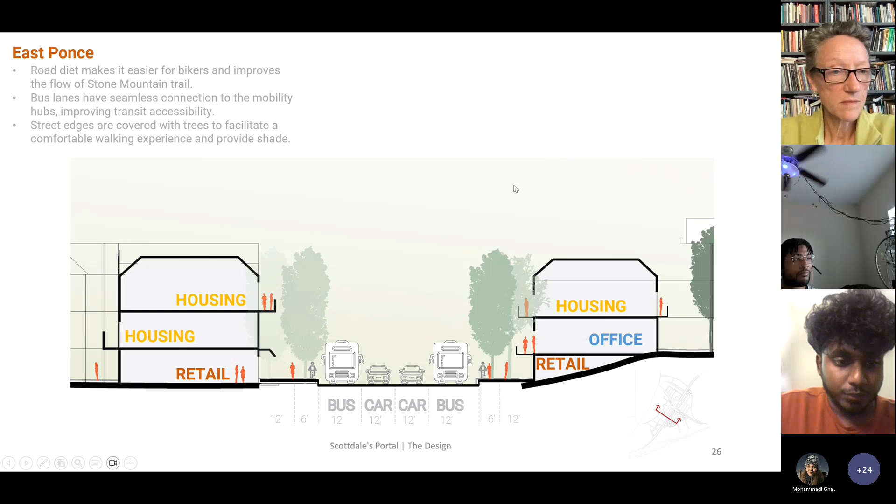So this is a section from the DeKalb industrial way towards the public parking. This shows the type of density we're trying to achieve and the type of housing heights we are proposing. It starts from the dog park, so one can get down at the mobility hub, pet the dogs, and then get all the way to their favorite restaurant.

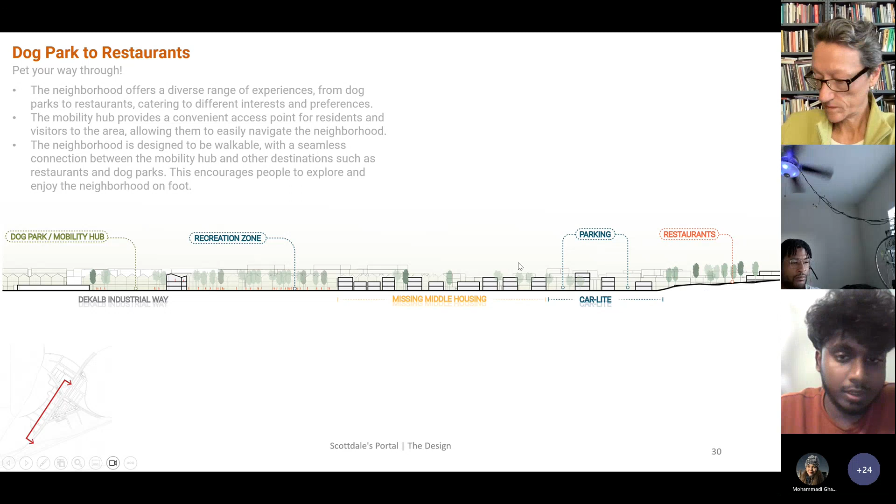And this is the overall density we are proposing. Most of the high density we are trying to keep towards the edges, as you mentioned earlier. All the smaller townhouses will be placed towards East Ponce de Leon, which will all lead towards the mobility hub in the center.

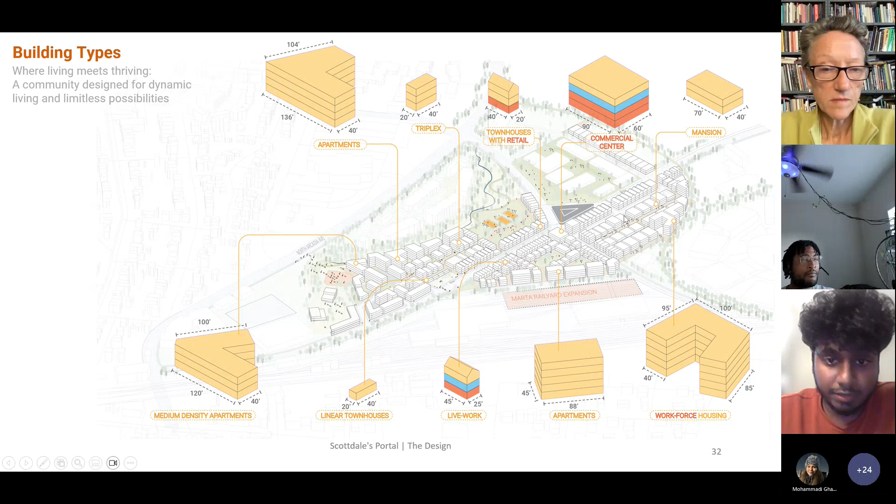Most of these on the edges are the tallest ones, with a maximum of 5 floors, and the ones closer to East Ponce will be a maximum of 3 floors. In between, we explored the missing middle housing types, which include triplex apartments, mansions, and basically low, high, and medium density housing. The good thing is most of these new developments are car free, so it's going to be a very vibrant neighborhood.

And moving into the details of the Mobility Hub, Isaiah would be taking you through the main Mobility Hub that we had converted into a public space.

For Mobility Hub, in order to promote the individual lifestyles of the residents of Scottdale for generations to come, and connect them to adjacent communities, we have proposed a neighborhood hub at the central intersection of our site, with a sub-hub a few minutes walking distance south down East Ponce de Leon Avenue.

On the first floor, we have 2 MARTA pickup and drop off locations, one on East Ponce de Leon and one tucked adjacent to the EV charging lot. That drop off also integrates a via pickup and drop off that includes the rideshare options under the umbrella. This also has restrooms and areas for seating and productivity.

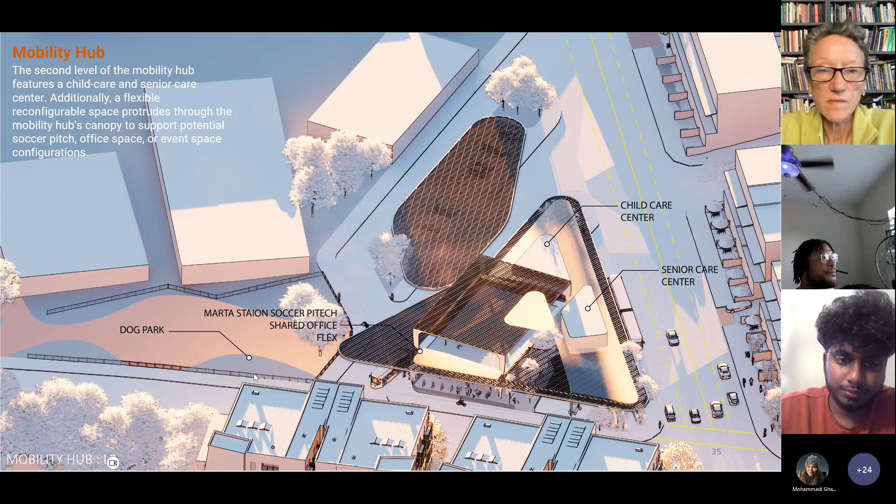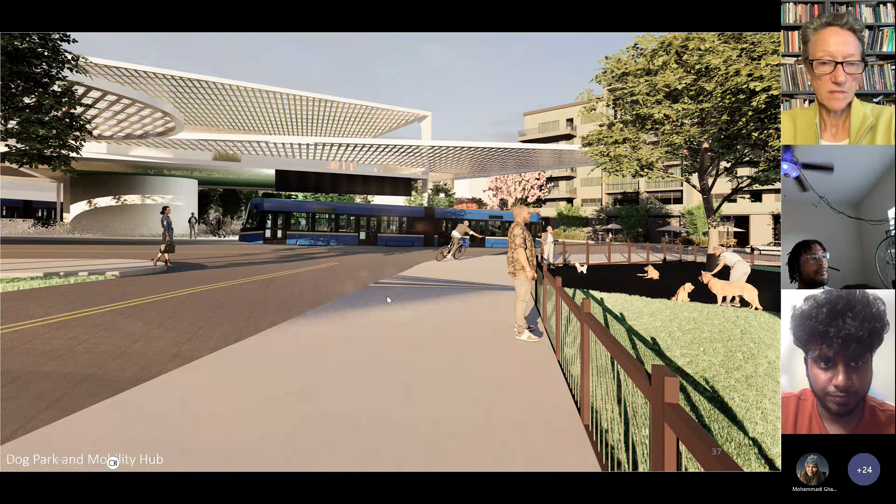A view in between the other pickup and drop-off lane and the dog park, just showing the space that's presented with this arrangement of amenities and features.

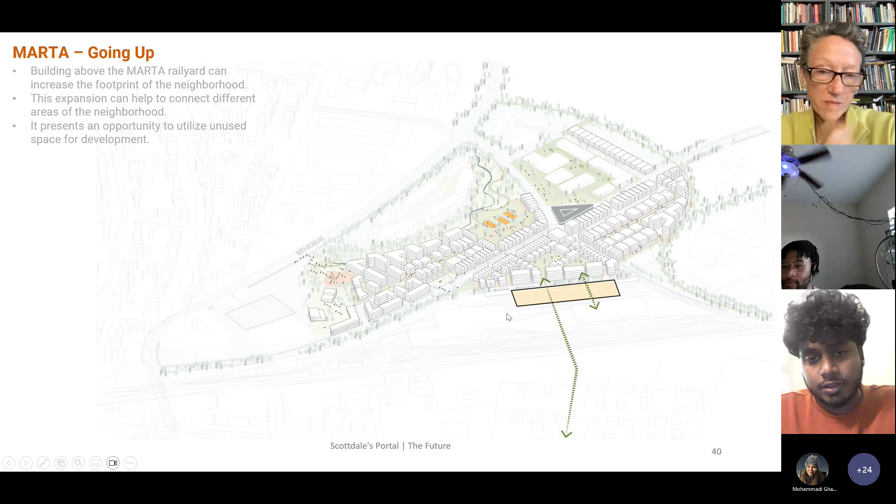One more thing we explored, apart from proposing this framework, is that even though this is a self-sufficient network framework by itself, we explore the possibility of building on top of the MARTA rail yard. We had a conversation with MARTA earlier during the semester, and they said we could explore that potential possibility. So we were trying to establish a connection from the east side to the west side of the site, and initially we started off with the basic connection of the roads.

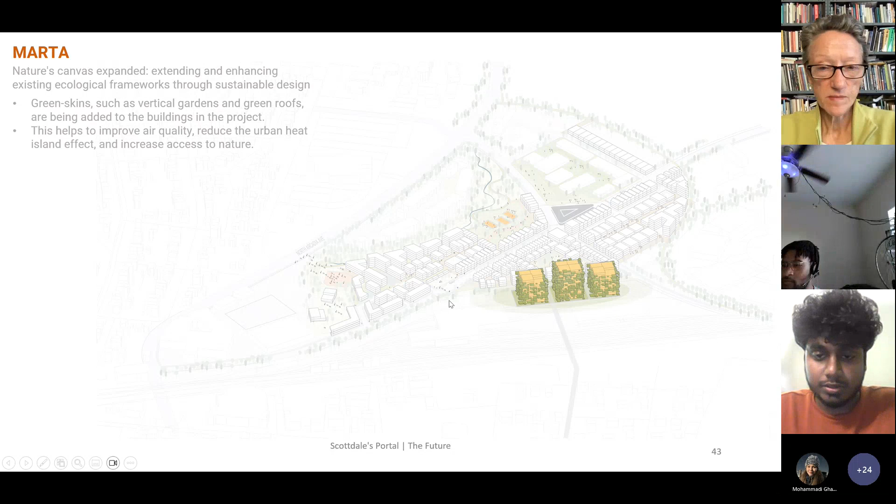One important aspect we focused on was increasing the density, to tap into the transit-oriented development of this neighborhood. As we go vertical, it was also important for us to explore the type of vertical public spaces we could possibly give, and what kind of treatment these structures would have, so that it incorporates with the framework we already created.

So this is the overall future vision for the project, which is integrated within the new and the old system. And this is the view visible from the MARTA rail yard. So this is the kind of density that we thought we could explore into.

Overall, we have reached the end of our presentation, and this proposal mainly aims to retrofit the intersection and increase the overall density and walkability of the zone. That's it from us. Thank you.

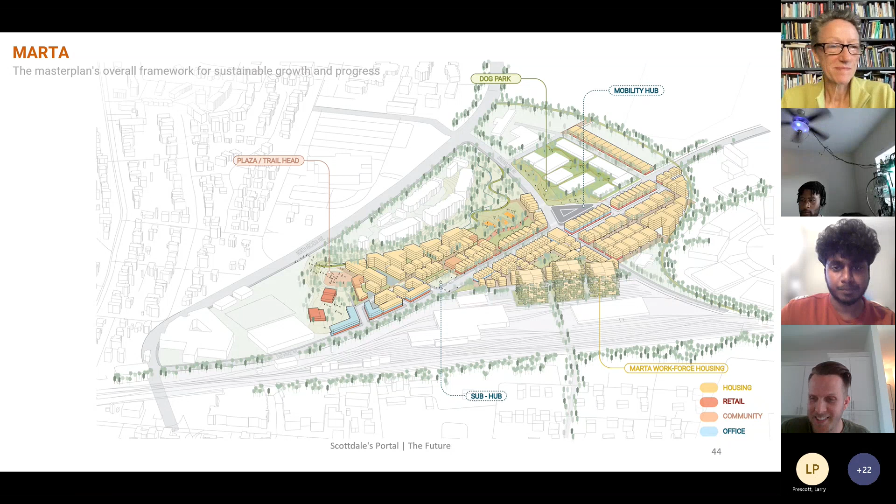Yeah, in Denmark. There's also quite a bit of it in Kuala Lumpur and Singapore. One sees quite a lot of green on the balconies, essentially. I love it, I think that's great. I want to see more rooftop gardens and rooftop farms, Ellen. I love it, great inspiration.

Well, I don't want to hold anyone up, it's 4:30. It has been so really, really gratifying, I think for me personally. I want to thank the students—I know you've had a lot to wrestle with. Each of the sites presented quite different challenges, and I was particularly thrilled with how different each scheme is, but how they actually really knit together to make, I think, a much more diverse and really interesting and compelling place for Scottdale.